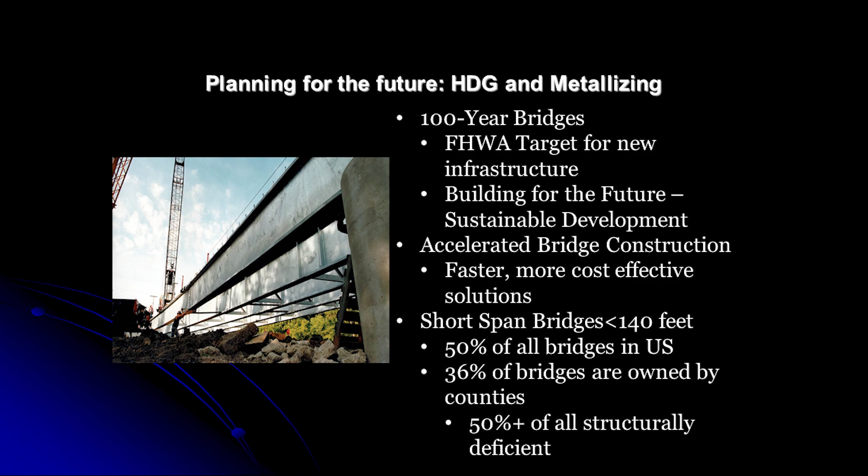International Zinc Association is a nonprofit organization, so we want to promote anything that has to do with zinc coatings, galvanizing, metallizing, zinc-rich paint. We try to give people the best practices and some of the things that are happening in the world today, because we're all taxpayers first, and we need to do something to save taxpayer dollars. Federal Highway is looking for a 100-year bridge. How are we going to get a 100-year bridge with coatings? Well, we have case studies that show galvanizing and metallizing can actually give DOTs and bridges a 100-year life. Did you know that 25 to 30% of corrosion can be eliminated if the right corrosion protection system was employed right out of the get-go?

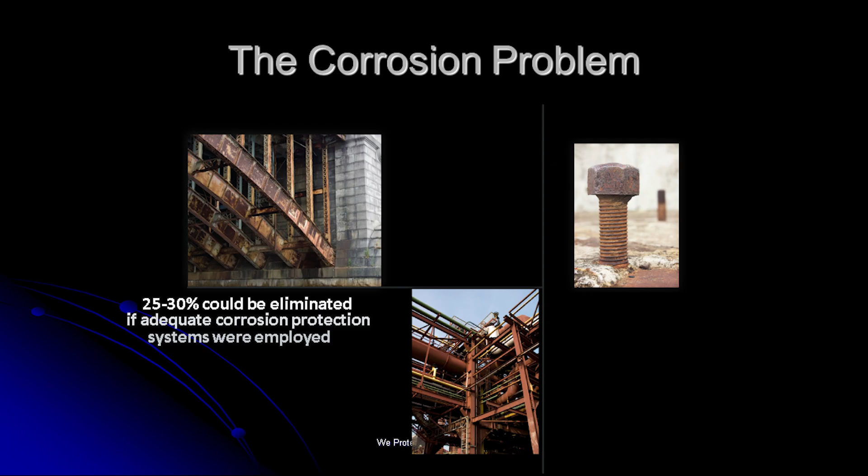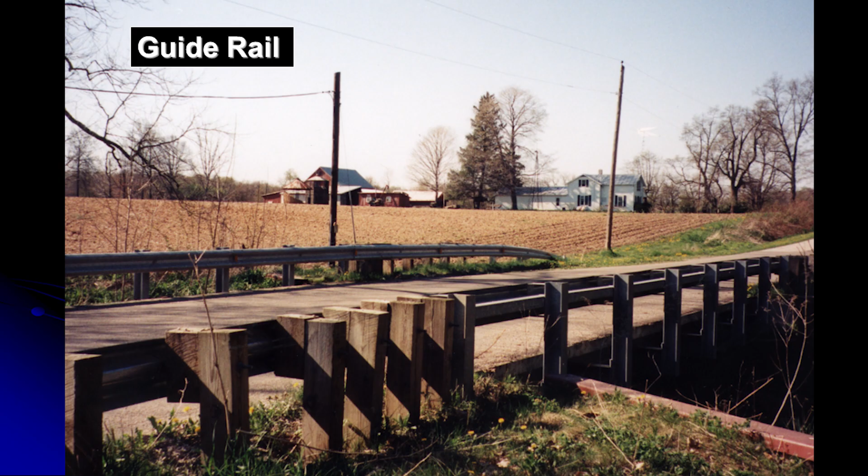Here's some guide rail. Why is it federal, highway, state, local, state engineers are specifying hot dip galvanizing for guide rail, but we're painting our bridges? I mean, we know that galvanizing works. It's a proven technology, and it seems like we're just keeping going down the same path. The one thing that's good is we're starting to use zinc-rich paints, and the zinc-rich paints are giving a lot longer longevity in our bridges.

A colleague of mine from Ohio, a county engineer, brought him out to this bridge and wanted to know why 13 years later his three-part paint system is failing. But you've got it right there, that's actually hot dip galvanized, and that was put in at the same time. The hot dip galvanized is still in fine, pristine shape.

How would you fix this? You can fix this. How would you fix this? This is not a trick question. You can fix this. How would you fix it? Yeah, sandblast it, but if it's in a salt-infested environment, it's recommended you power wash and remediate the salts before you sandblast it. A lot of people aren't doing that. They're starting to come to that, but this is definitely fixable.

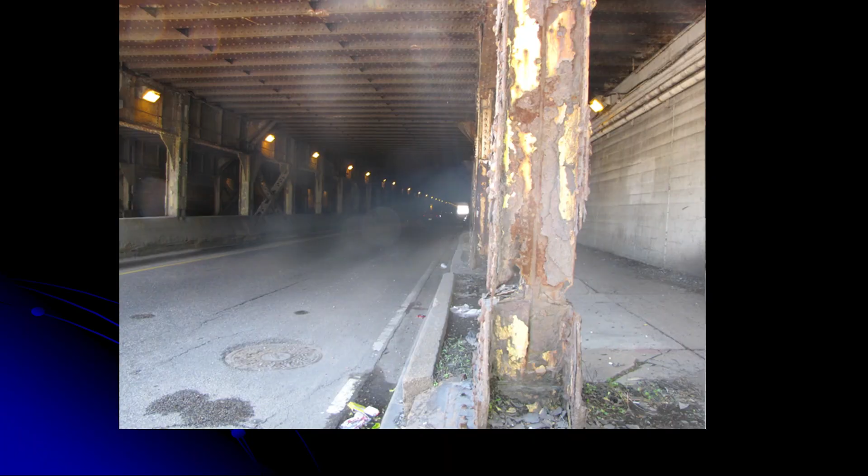What about something like this? This is actually in Chicago, about a mile south of United Center. With steel, this is fixable. This looks terrible, right? Oh, man. For you engineers, how would you like to go underneath this bridge? This bridge was in service at the time that this shot was taken, but this is fixable. Steel is fixable. Okay, and here you can see, here's the fix.

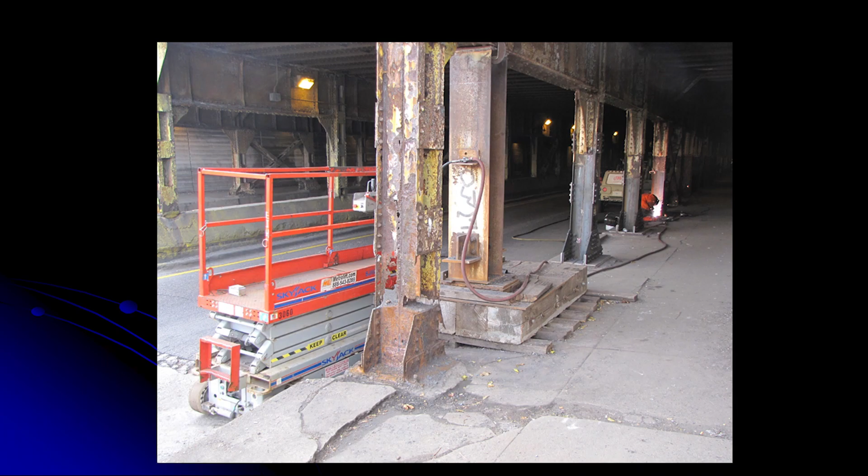The problem that I have as a taxpayer is they replaced the steel, but they came back and they never put a coating on that part of the steel. And there's the fix. This is about 2 years later. So steel is fixable. That's the good thing I like about steel.

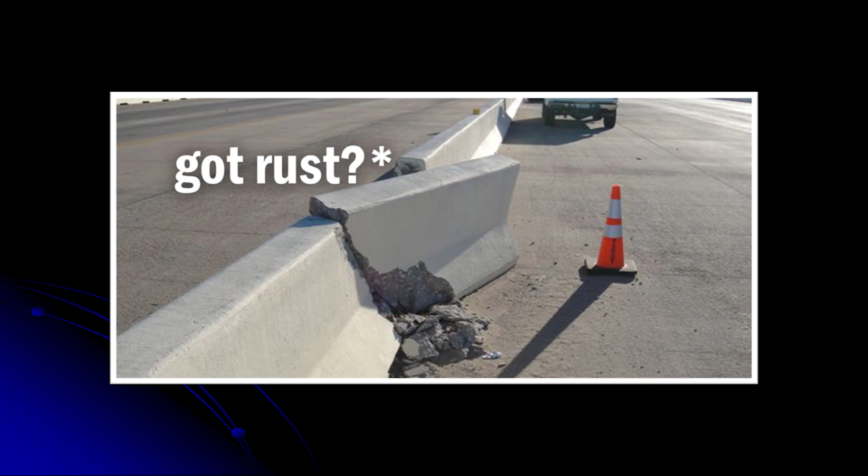So, does anybody know what the worst accident in NASCAR history is? Does anybody want to guess what the worst accident in NASCAR history is? You would think a crash, or a car going up into the stands, or a tire coming off. No. The worst accident in NASCAR history is a porous concrete bridge failing under one fifth of its weight. The chlorides came in and ate the steel, and as the people were going across the pedestrian bridge, it fell.

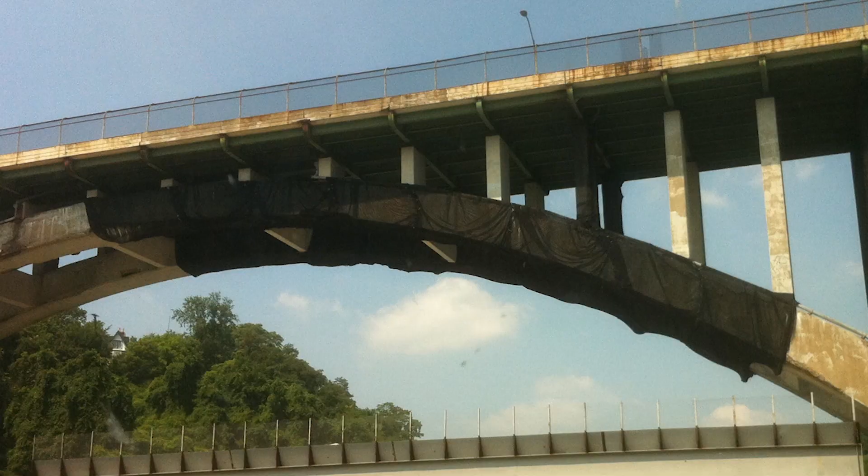This is actually about 10 years ago. I was at the International Bridge Conference in Pittsburgh, and I was going along the roadway, and I saw this mesh on top of this concrete bridge. The mesh was actually to keep the porous concrete from falling on the cars below. I thought that was interesting, but then the next shot is really interesting. You see that below? That's not a bridge. That's a $2.7 million catch basin. That's there just to keep the concrete from falling on the cars below. This bridge has now been replaced with a steel arch bridge.

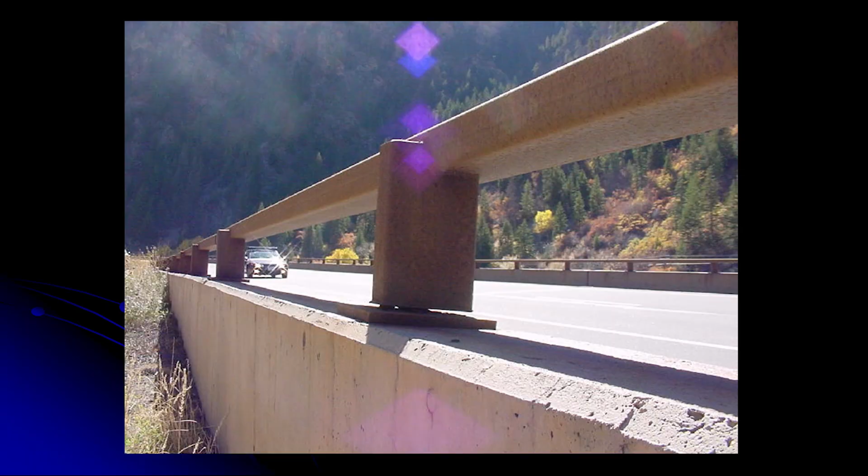And then weathering steel, we know that Federal Highway has a guide for weathering steel. Make sure you follow the guide. This is actually in Colorado, where they had 52 miles of this rail, and from the snow and the ice and the salts piling on top of this, you can see the welds are gone. They had actually replaced this rail, and had to get bond money to replace it. I mean, it fit in really well with the mountains and everything, but it didn't have the longevity that they had hoped for.

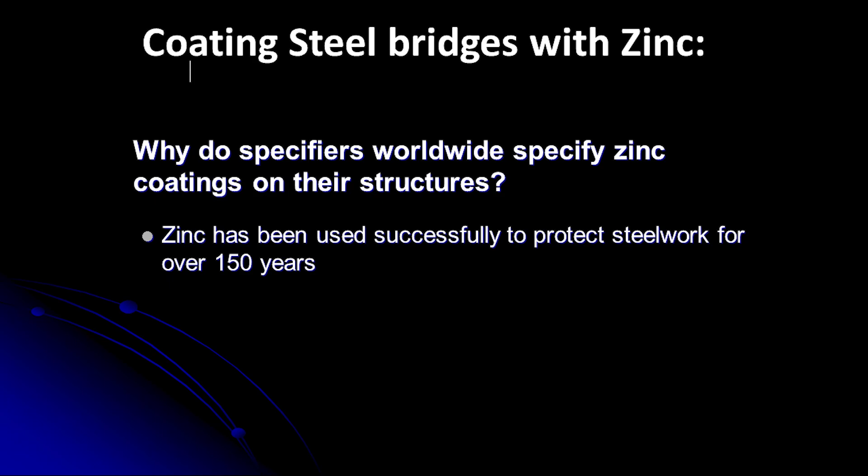Worldwide, zinc is protecting. I mean, everything that goes around, you see zinc protects. Zinc is starting to get more and more notoriety throughout the world. It's been used for 150 years. This is actually a bridge in Illinois. It's hot dip galvanized. It was actually hot dip galvanized in 1970. It's a little north of Champaign in Illinois.

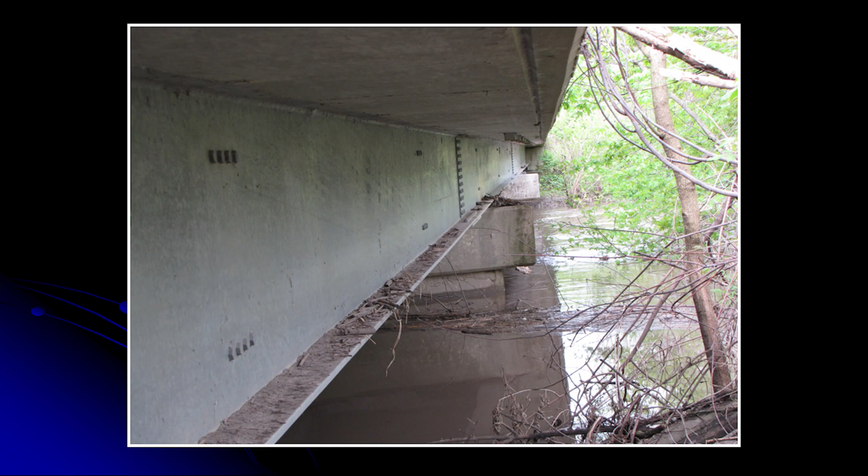This bridge is over 50 years old. The county engineer, Craig, told me that this bridge is underwater several times a year, with big logs, sticks and debris pounding on the side of it. But it's still fine, in pristine shape. You can see that from this shot.

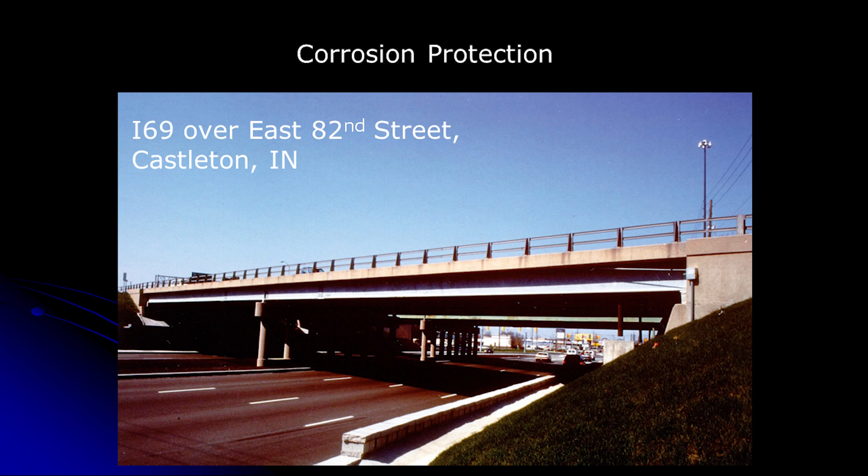Dr. Rob Connor from Purdue University thinks this bridge was actually a Purdue initiative, because what they did is hot dip galvanize the two northbound lanes of I-69. This was in 1970, and the other side used lead-based paint. In '84, they had to blast and repaint the lead-based paint.

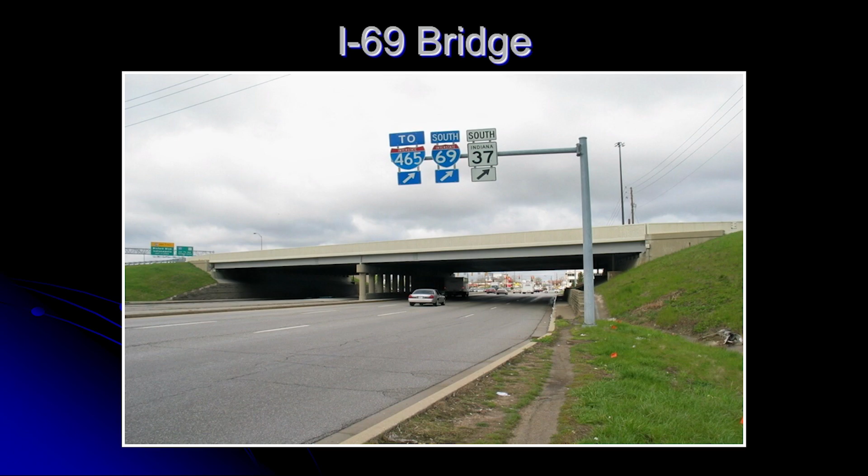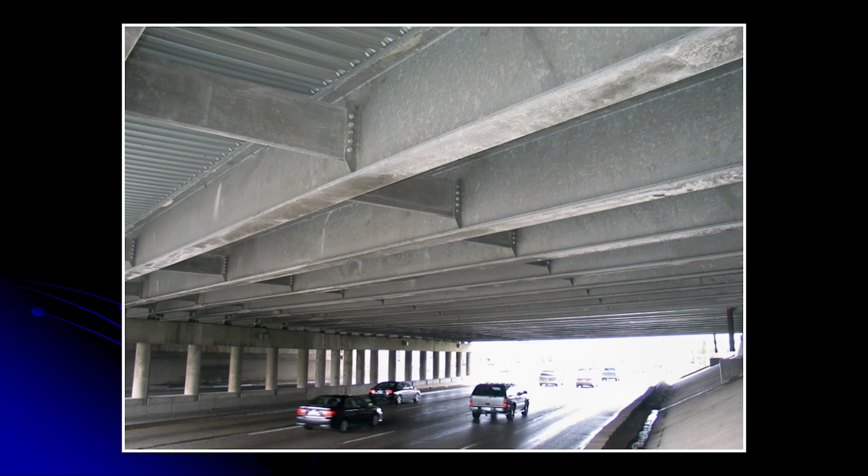In 2002, they decided to widen the bridge. You can see the gap in between there. So when they looked at galvanizing and the different technologies out there, they decided to metallize the existing portion of the bridge and metallize the 4 new beams they were putting in, and then paint them. So they duplexed that particular side of the bridge.

There's the bridge today. Here's the underside of the galvanized bridge. This galvanized bridge is over 53 years old, and it's still fine, in pristine shape.

The sad news about this bridge is I've been able to use it as a case study for many years, but I think next year they're actually tearing this bridge down to make the exits larger, which is really a shame. But Dr. Rob Connor is going to get a couple of these pieces to put in the S-BRITE Center at Purdue University, where he has a lot of pieces from the I-35 bridge and other old bridges.

But here's the mil readings on that bridge. For new steel to be galvanized today, we've got to give you 3.9 mils. Here's a bridge that's 53 years old that still has 6.82 mils. So for a 100-year bridge, no problem with galvanizing.

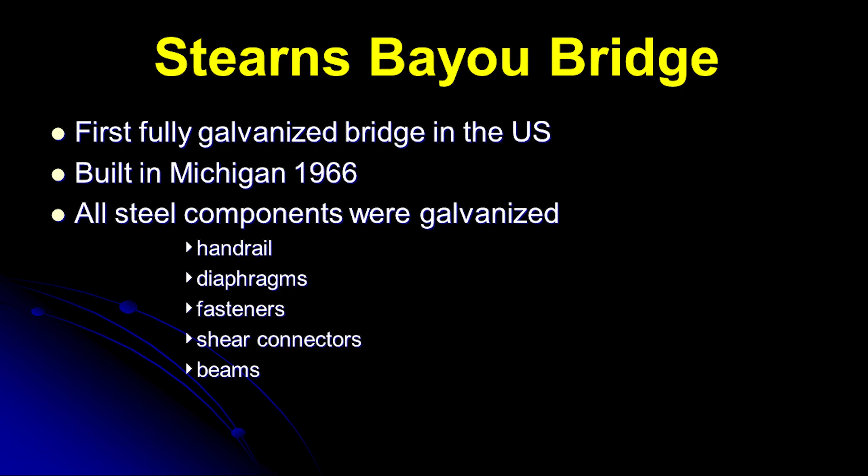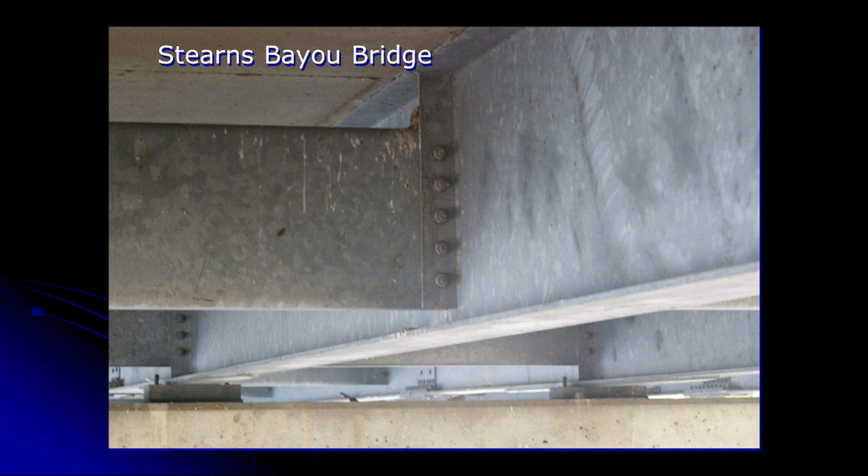And there's the pigeon poo. Pigeon poo does not bother or hurt hot dip galvanizing. So that's another nice attribute about galvanizing.

This is actually a bridge in Pennsylvania that was galvanized in 1971. It's still in fine, pristine shape. The solution: hot dip galvanizing gives you this long protection because it gives you a barrier, it gives you cathodic protection, it gives you a zinc patina, and it forms a metallurgical bond to the steel.

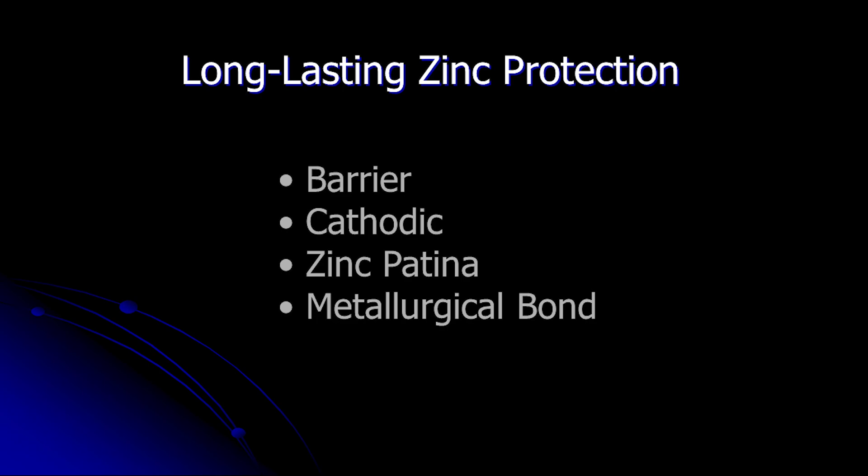Here's a bridge. As long as the paint, the galvanizing, the metallizing, even grease, as long as you have something to protect the substrate, it's not going to rust.

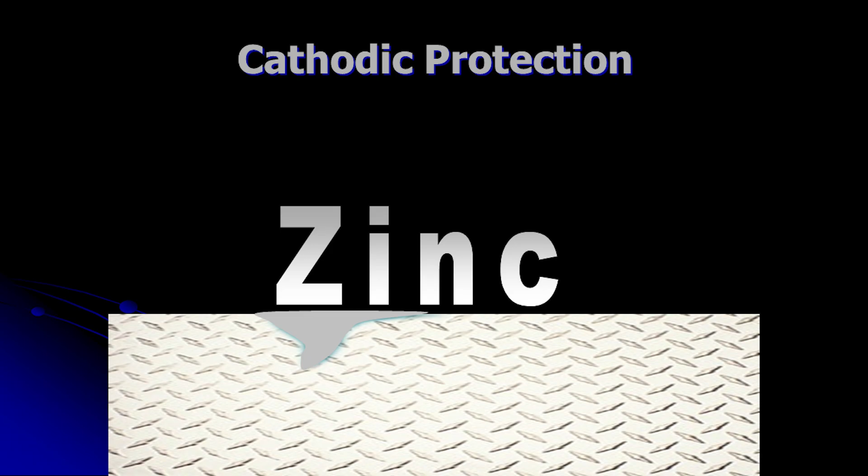If something is hot dip galvanized or metallized, you've got cathodic protection, where a scratch is going to be protected by the action of the zinc coating. And why is that? The galvanic series of metal: zinc is the anode, steel is the cathode. The anode is always going to want to protect the cathode. It's a law of nature.

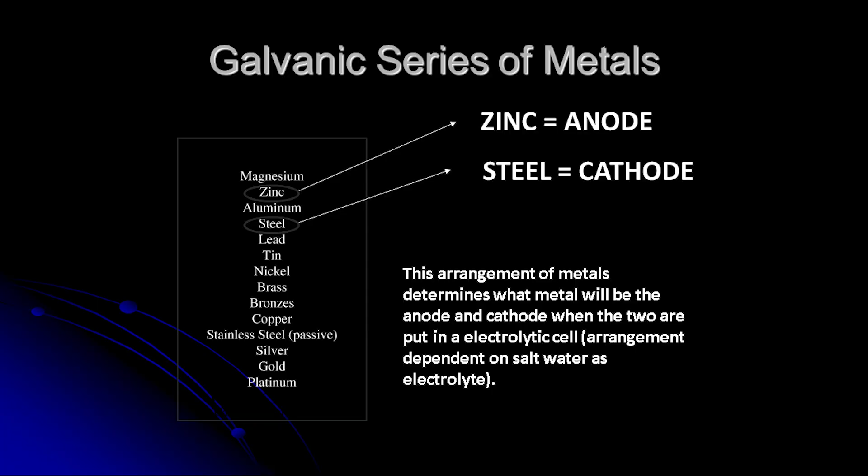If you look at a lot of boats and vessels, they have these zinc anodes, and they actually have screw holes on there because as the zinc slowly depletes, you replace them with other ones. Zinc corrodes at 1/30 of what steel corrodes at. That's why zinc gives you that long-lasting protection.

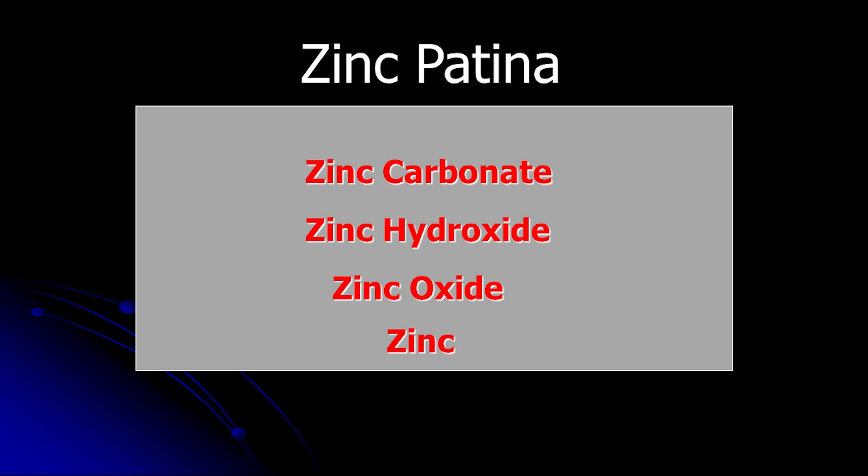And you've got the zinc patina. So a piece of steel comes up out of the hot dip galvanizing bath, and the first thing that hits it is the air. After the air hits it, the first patina is formed, and that patina is zinc oxide. It sits around a little while, and by the time moisture or rain gets on it, the next patina is formed - that's zinc hydroxide. Then after it sits around longer, with carbon dioxide, usually anywhere between 9 to 14 months, the last patina is formed as zinc carbonate.

Zinc carbonate is very stable. When you have something that's been out in the weather, galvanized over 14 months, you don't have to worry about doing any prep to the galvanizing. But if you're going to paint over galvanizing in the first stages, with zinc oxide or zinc hydroxide, there's a prep required, and you follow ASTM D6386.

When you have the zinc carbonate stage, you just come in and power wash it and give it a coat of paint. You don't have to do any prep. So our whole thing is with galvanizing, you should never have to sandblast or abrasive blast that bridge again, as long as you maintain the galvanizing coating that's on there. We feel that's a game changer, because for state DOTs, the biggest cost in painting a bridge is the prep—taking the old paint off and then re-prepping, setting up. If you can just power wash and then repaint, how much of a savings is that going to give the states? It's going to be a lot.

Hot dip galvanizing is metallurgically bonded to the steel. What do we mean by that? It's actually part of the steel. So the gamma is 75% zinc, 25% iron. The delta is 90-10. The zeta is 94-6, and the last is the 100% pure zinc.

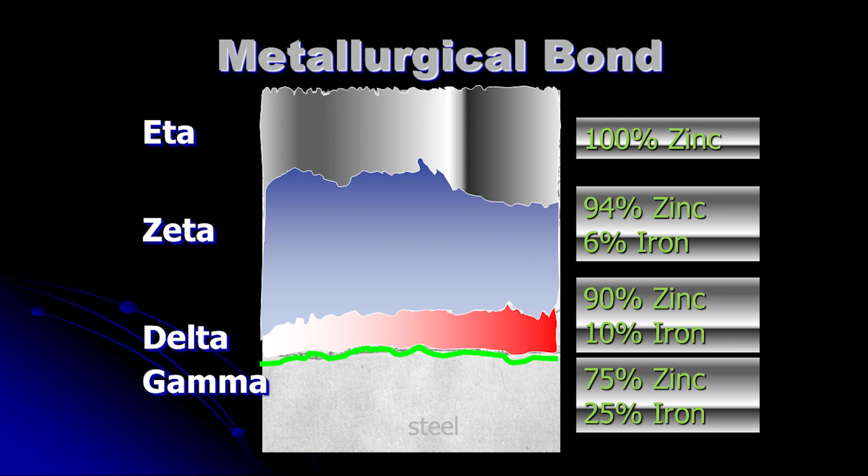So you're not going to have to worry about water coming underneath the coating and popping and peeling and chipping it off. The zinc slowly corrodes, and it corrodes at a rate of, like I said earlier, 1/30th of what steel corrodes at. What about the hardness of hot dip galvanizing?

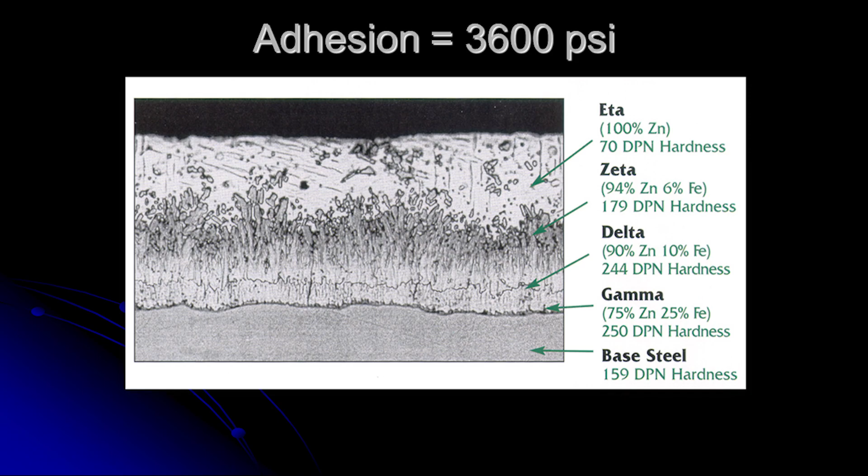What about the edges? We grow the coating and then freeze it, so the edges are going to have the same amount of coating as the flat surface, which is a wonderful thing, because when we look around our cities, the edges and corners is what usually fails most, because the surface tension of paint wants to roll off.

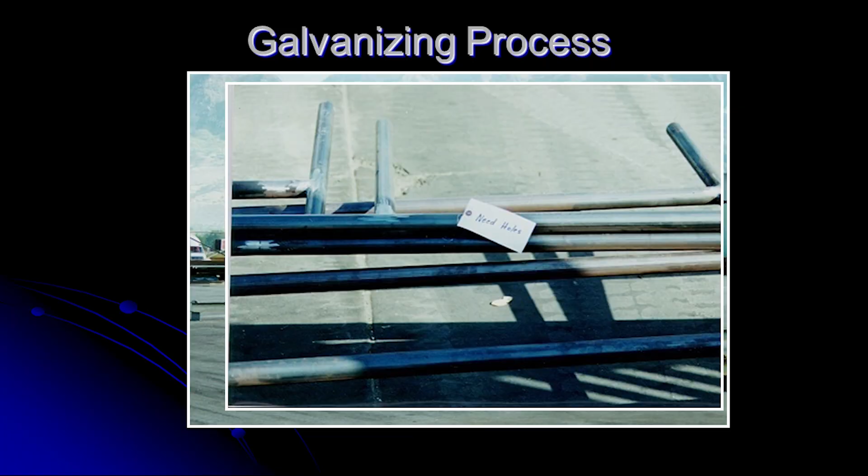Has anybody here been to a galvanizing plant? How many people have been to a galvanizing plant? A few of you. For all of you that want to go to a plant, you can call me, or there's galvanizers in most states, and they'd be happy to give you a free tour of the galvanizing plant. It's pretty interesting.

The steel comes in on a truck, a van, a car. It goes to a process area where they tag it, get it put on a rack, and then it goes through this series of baths. The first bath is a degreasing bath to get rid of the grease, grime, oil, or dirt. It gets rinsed, then goes into a pickling bath, either sulfuric acid or hydrochloric acid, to clean the mill scale and any oxides that are on it. Then it goes into a flux bath.

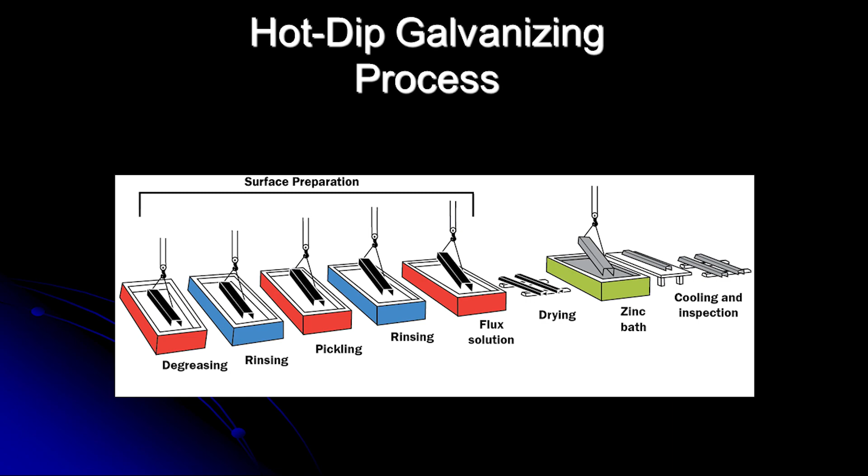The flux bath actually preheats the steel to 160 degrees. It puts a light coating on it to keep it from oxidizing before it goes into the molten zinc. Once it goes into the molten zinc and comes out, it's ready to go. There's no cure time—you just have to wait for it to cool and put it on the truck.

Most galvanizing baths in the United States run anywhere between 830 and 840 degrees Fahrenheit. And to meet the ASTM 123 spec, they have to have a minimum of 98% pure zinc in their kettle. Some people add aluminum, bismuth, and nickel for fluidity and reactivity and things like that. And what ends up happening is you have this intermetallic of iron-zinc that actually forms inside the kettle bath. Then once the steel hits temperature, it's ready to come out.

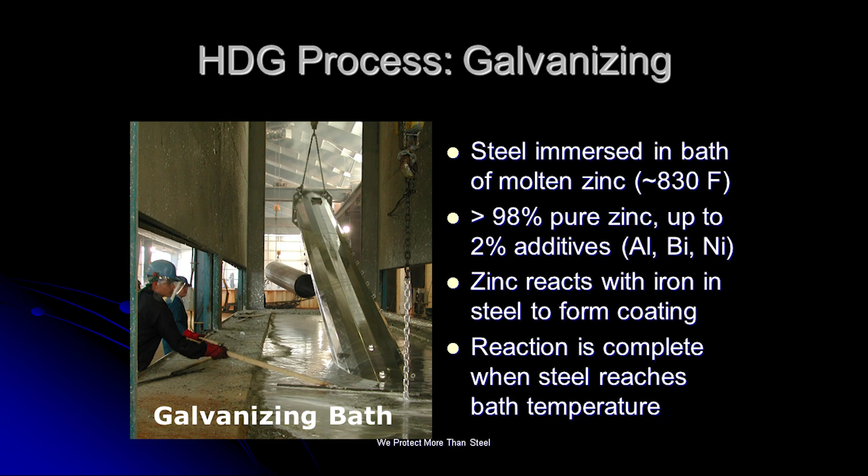If there are any impurities on the steel, the zinc will not adhere to the steel, and we call those bare spots—you know it right away, you don't have to wait. This either needs to be fixed with ASTM 780, the repair of hot dip galvanizing, or the galvanizer will just take it back, and they'll rerun the piece and re-galvanize it. They'll strip the zinc off and rerun it.

Hot dip galvanizing—zinc is recyclable. That's used today. No volatile organic compounds is another big thing with that.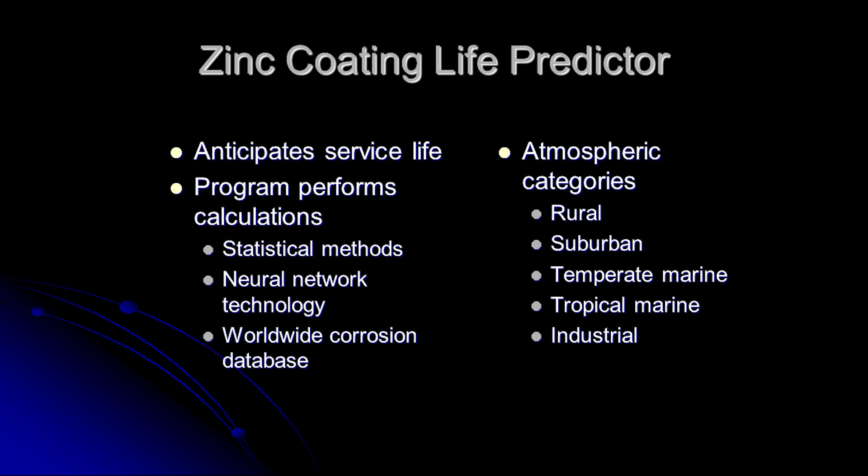This is actually a life predictor that academia did many years ago, and what they did is they ended up looking at all these different environments: industrial, temperate marine, suburban. So if you take a look at that bridge north of Indianapolis in the snow belt, in a suburban community, if you look at this chart, 3.9 mils in the red should give you about 95 years before you get 5% surface rust. Now, 5% surface rust doesn't mean the zinc coating has failed. What happens is we're saying the eta layer is gone.

You still have some of the other delta and gamma, so that zinc is still there. Now it's time to come in and power wash and give it a coat of paint. And this way, that's what we're talking about - if you don't have to abrasive blast that bridge, it's a game changer.

So that's at 3.9, you've got 95 years. Look at that bridge in Indiana - it's 53 years old, and we still have 6 mils of zinc still left on it. So there's your 100-year bridge, no problem. And there's the chart again.

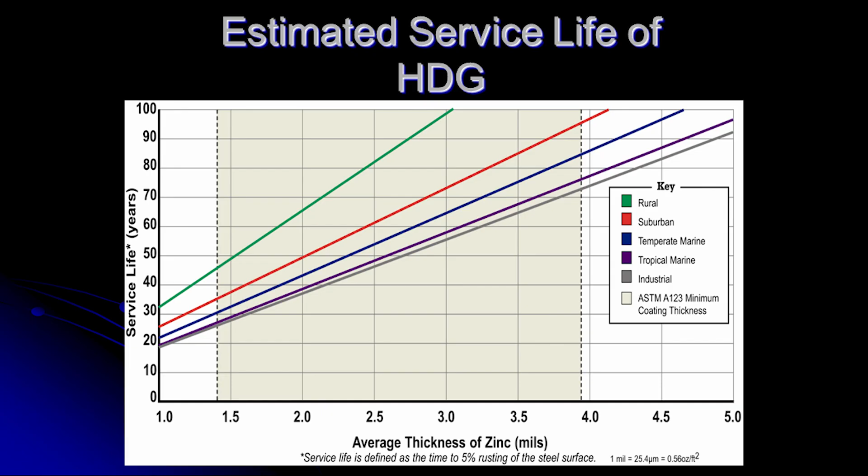Remember, hot dip galvanizing is metallurgically bonded to the steel, and also has cathodic protection. So any scratch or any ding, you don't have to worry about undercutting and things like that.

What about metallizing? Metallizing is really coming on strong, and one of the reasons why we see metallizing coming on strong is because industry and the states are looking for something with more longevity. So what's happening is we've got, I believe 4, I think it's up to 5 now, bridge fabricators that actually have metallizing equipment inside their plants. So not only are they fabricating the steel for the bridges, they're metallizing it in-house. That's a game changer for the fact that now they're lower cost producers and there's more competition. Metallizing is going to continue to come down in price, which is good for all of us, because like I said earlier, we're all taxpayers.

So metallizing is either zinc wire or zinc powder that gets heated up or gets arced together, and it actually atomizes the zinc, and you have molten zinc that actually gets thrown onto the substrate. It's either field or shop applied, and it's 85% as dense as hot dip galvanized.

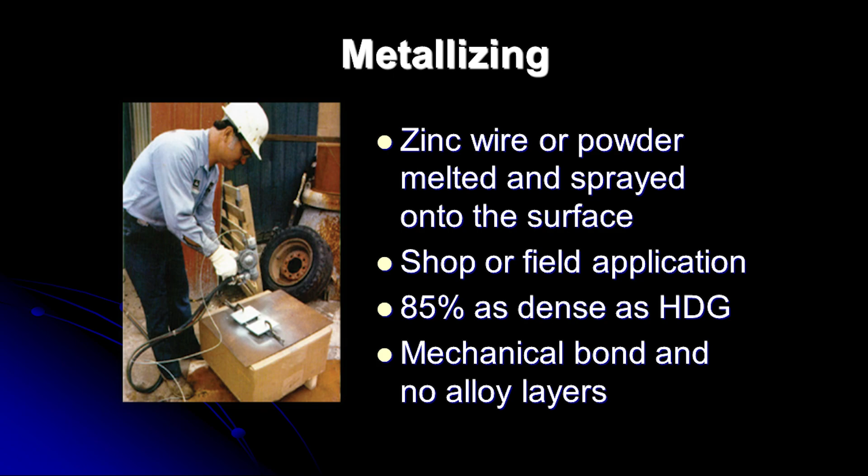And it's a mechanical bond. It's not a metallurgical bond, so there's no alloy layers. And you got several specs out there - you got the spec from NACE, the spec from American Welding Society and SSPC. Now they've come together as AMPP.

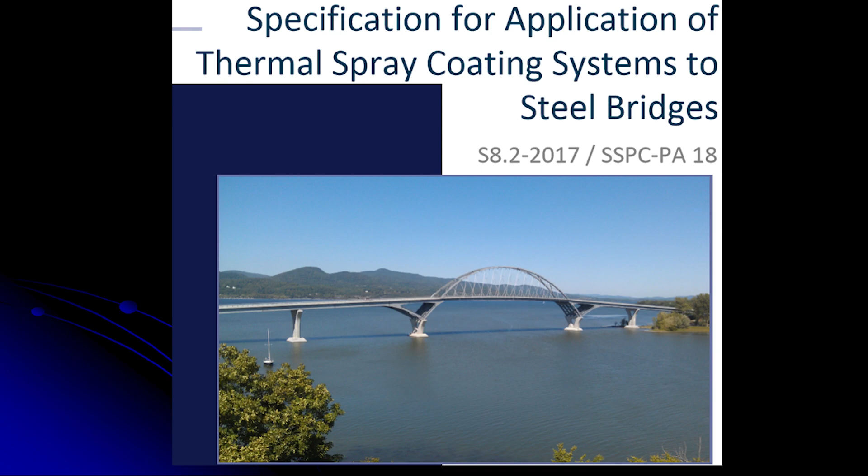But the thing that's really good, in 2017, and some of the people in this room I know were on this committee, we came up with a metallizing spec for the bridge and highway folks, because they just wanted to give them something - hey, what's a good spec if we want to metallize, a good guide, because it's all over the board as far as what to do and what not to do. There's a couple revisions with this, but this is a really good guide to get the states going if they want to go with a metallizing specification from the National Steel Bridge Alliance.

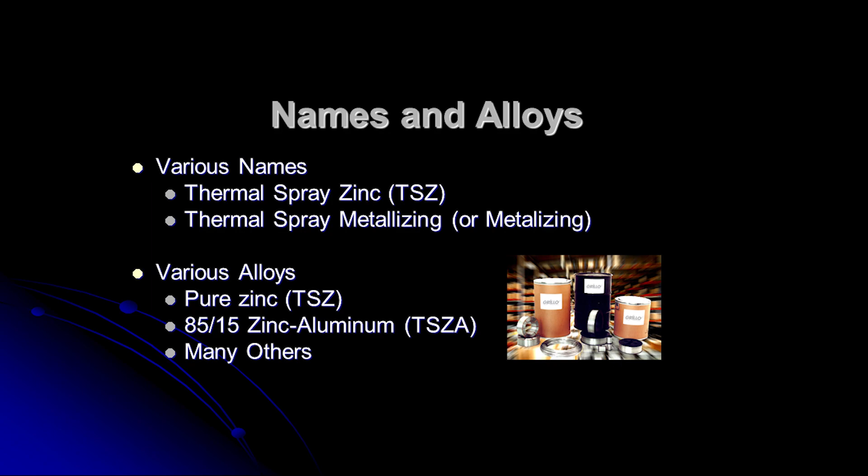And there's different names and alloys. For bridges and highway, it's usually 100% zinc or 8515, which is 85% zinc, 15% aluminum. And the 8515 is usually used in places where they have a lot of salt on the roads or by the coastal areas, because you're going to get a lot more longevity out of 8515 than 100% pure zinc. And this is a 100-year-old process. This isn't something that's brand new. This is a proven technology.

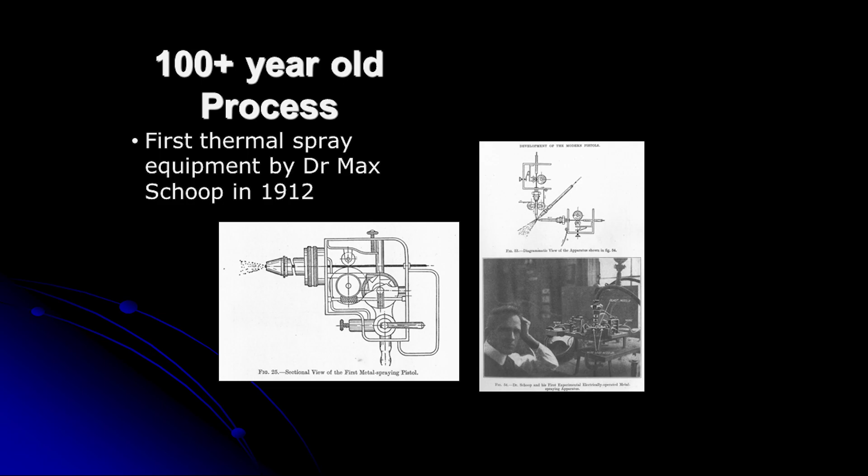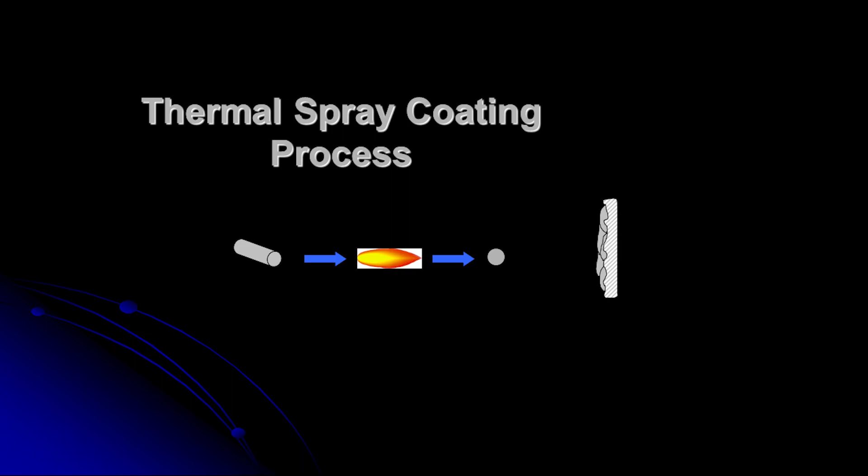So the thermal spray process - here's a piece of zinc wire. It goes through a flame. That flame atomizes the zinc, and then it gets thrown onto the substrate. This is just the equipment that's involved in flame spraying, okay, which uses a flame. And you can see right here that's actually atomized zinc that's actually come out of that flame.

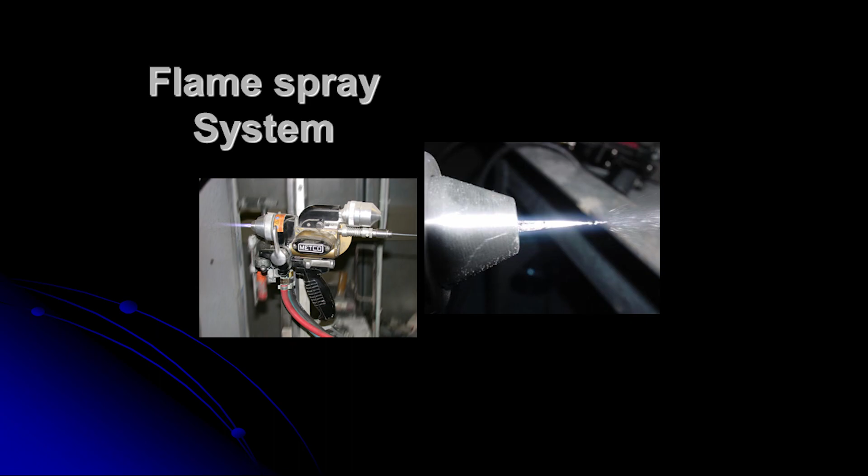But for the bridge and highway world, this is a much slower process - this is for smaller stuff. For the bridge and highway world, what people are using is the twin arc spray, where you have a positive and negative zinc wire that actually come out, and when they're energized and when they touch, that atomizes the zinc, and then you have clean air throwing it onto the substrate.

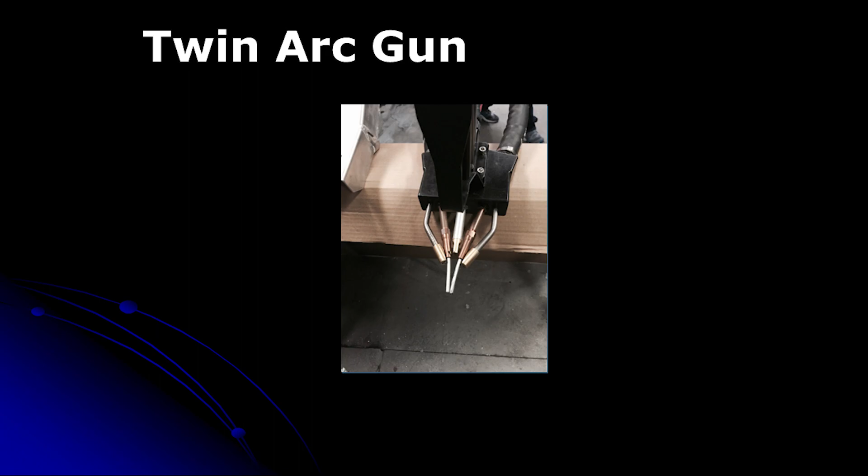And that's what the gun looks like. When those two pieces of wire are powered and they hit, that's what arcs and throws it onto the substrate. There's a shot of the inside of the gun.

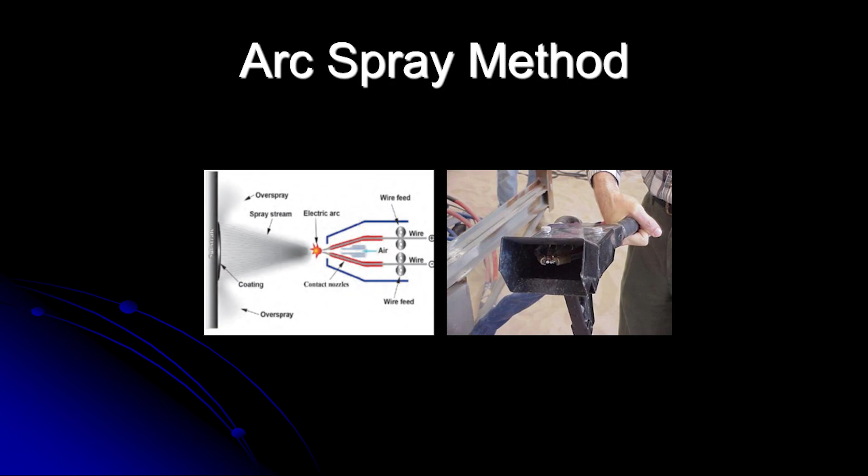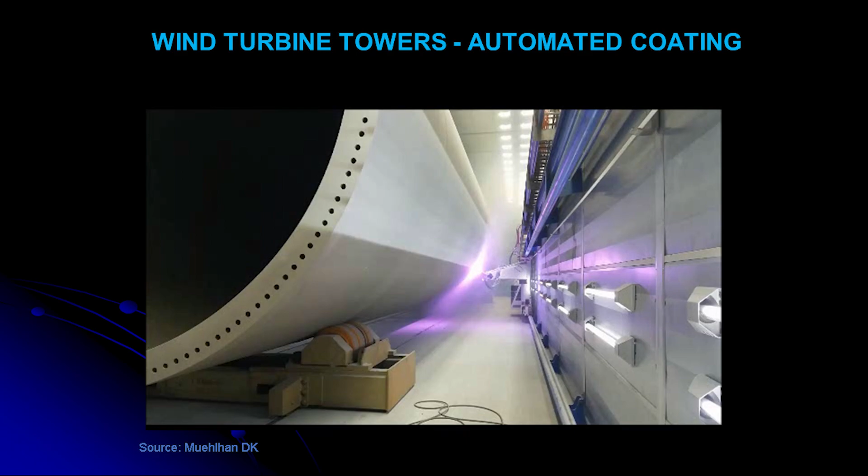But things are changing, because a lot of companies are automating the metallizing process. Now it's a factory-controlled process with a robot doing it, as well as manual work. Some wind turbines are actually metallized via robot. At the Steel show last year, there was a guy with a robot that came in and did one side of a beam, flipped up, did the other side, and came down. People are looking to get faster and better, and that's going to drive the cost down even more.

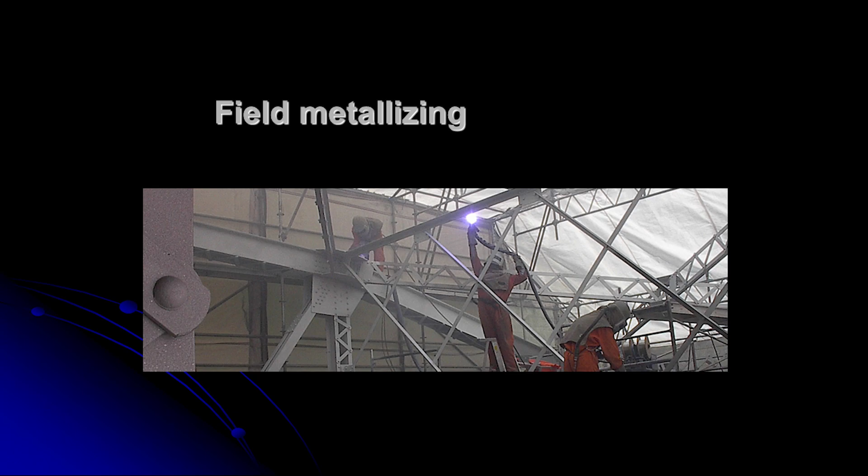Here's some people doing field metallizing. A lot of times these bridges that are in the field can be metallized. There's the Kodiak Bridge in Alaska, the longest bridge that was metallized - they actually field metallized it in place, and then sealed it in place. Here's another shot of a field application of metallizing.

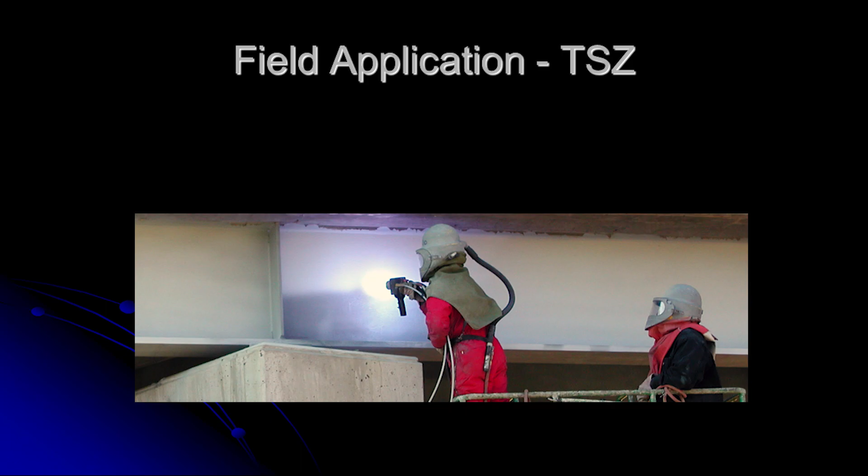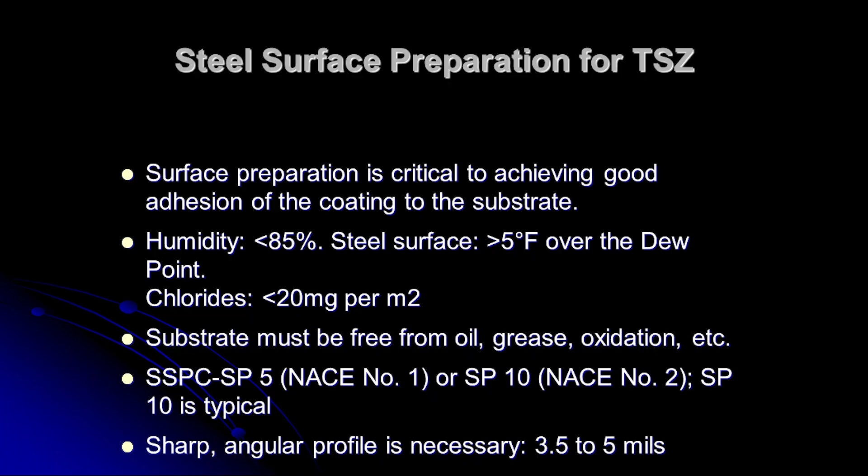One of the things I want to bring up - there's all different dew points and things to consider. The main thing is, if you're going to metallize something, you want to make sure whoever abrasive blasts the steel gives it an angular profile. You need something angular to get that zinc to adhere to the substrate. We always say a 3.5 minimum angular profile, and then you'll have a good profile for that zinc to hang to, so you get nice, good adhesion.

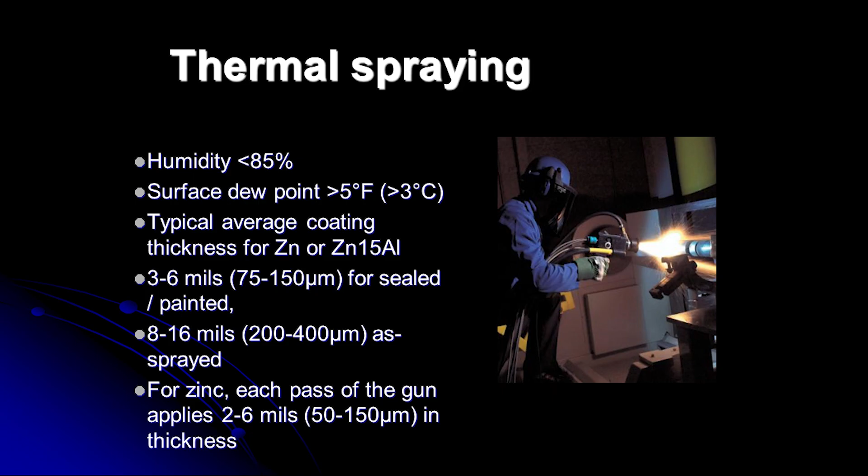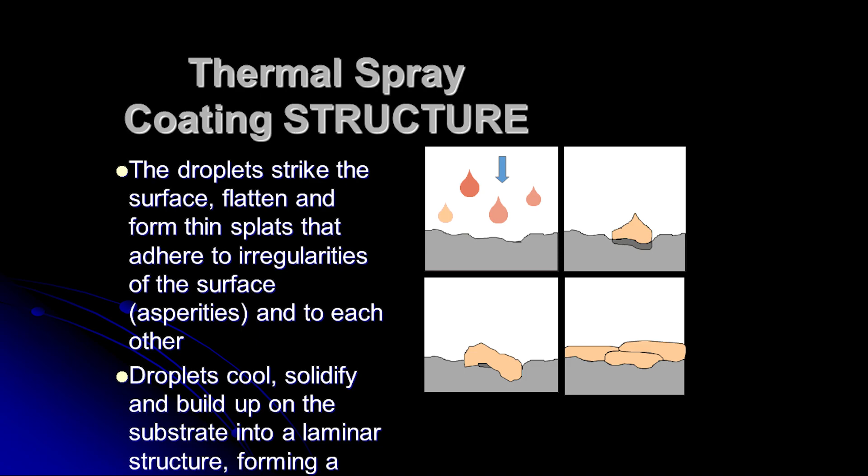The times and passes, depending how fast the guy's going, result in anywhere between 2 to 6 mils. Some people want to seal the metallizing, some don't - there's a lot of different sealers. I'll talk later about a sealer somebody did in Canada that I think is pretty interesting for metallizing. So you have all these blotches, these upside-down Hershey Kisses, being put on the substrate, and they pile on top of one another. What ends up happening is you get some voids, oxide inclusions, and unmelted particles.

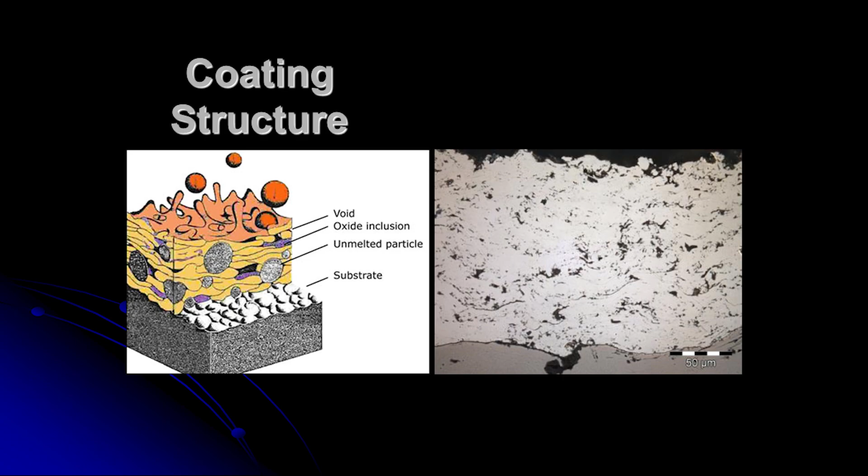Here's a micrograph of what the metallizing coating looks like. It's not like galvanizing where you've got some inclusion and porosity in there. That's why they say to build it up a little bit. But it's still a wonderfully great coating, and it's going to give the longevity that the DOTs are looking for.

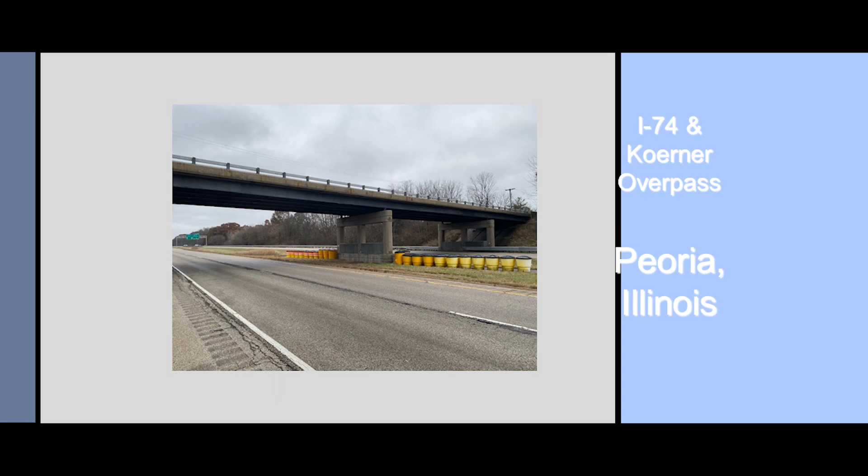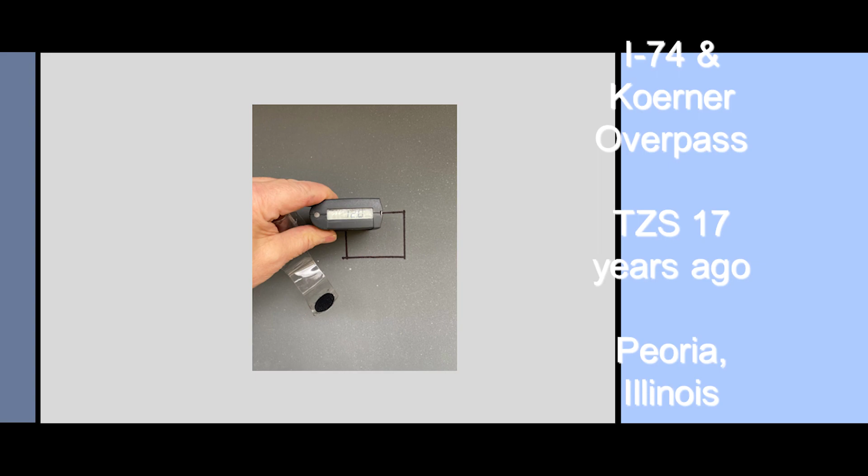This is a bridge I was on a couple years ago in Peoria. It's now about 20 years old, but the average mils on this is over 13 mils. What you do is put a center punch to mark where it's at, and draw it, so every couple years you can come back and see how much depletion the zinc has lost. This way the DOTs will know when they need to come in and power wash and paint it, because you don't want to let the metallizing and zinc get down to where you're into the substrate and now need to abrasive blast. It's a lot easier to come in and power wash and paint than to start abrasive blasting and do something else.

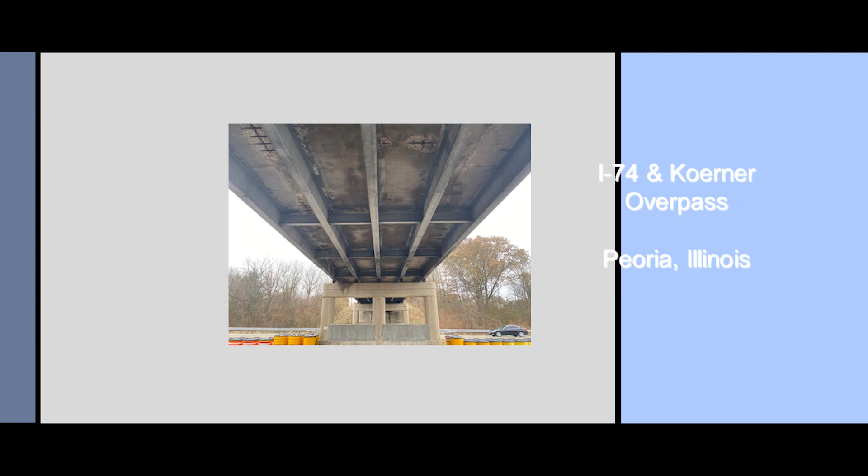It just shows you it's in great shape. On the other side, if they had used hot-dip galvanized rebar here, you wouldn't have the concrete peeling off of there.

This is actually the Jane Byrne Bridge in Chicago, called the Circle Interchange. When this job was being done, AECOM was the engineer, and they said it was one of the most complex bridges - or one of the most complex projects - going on in all the United States, because of the underground tunnels in Chicago: the water, gas, and electric lines. It was a huge project and a huge undertaking. Sarah Wilson, the District 1 bridge engineer, had been using galvanizing in all the bridges going down to Chicago since 2000. She wanted to do something, but knew a lot of these bridge pieces were too big. So what they decided to do was anything that wouldn't fit in a local galvanizing bath, they would metallize - and that's what they did. You've got over 100 million pounds in this job. It was a huge job.

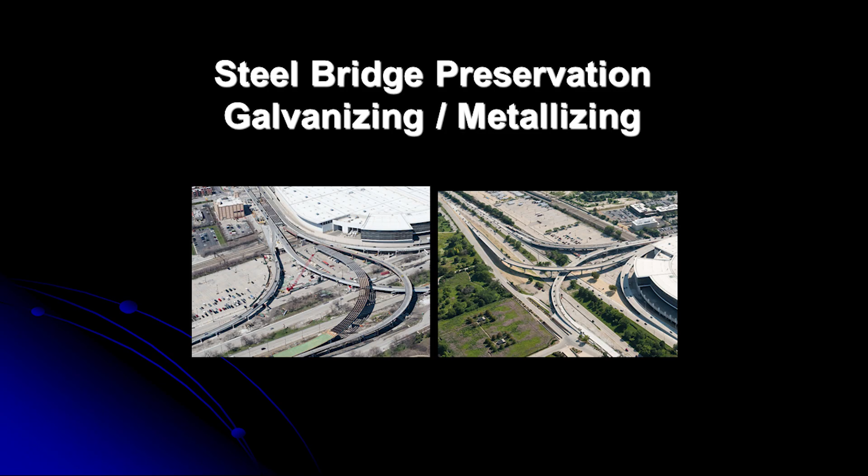I was actually on this bridge last year. I said, hey, this bridge is 3 years old - let's get some mil readings, so down the road you can see where you started and when you're going to need maintenance on it. So that's what they did. You can see there are my marks and the center punch - you take 5 readings across and 5 readings down, then come up with the average. That just shows you how huge this project and undertaking was, and it's almost finished.

It's like almost a 4-year project. Okay, what about other coatings?

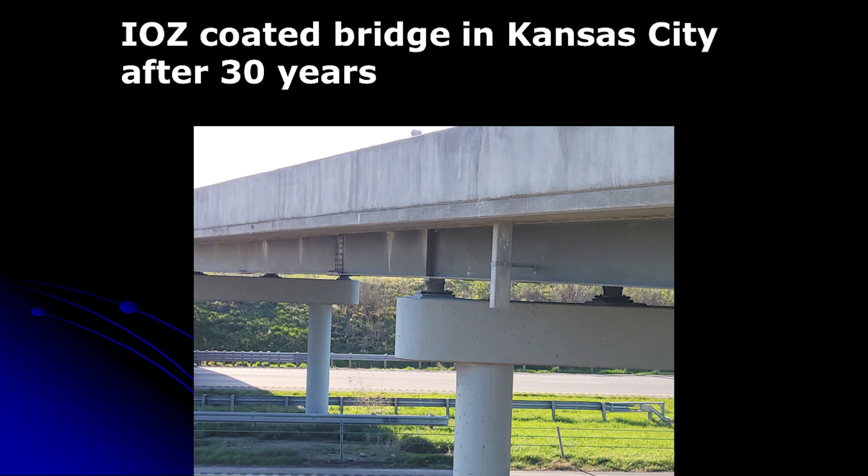Zinc-rich paint and zinc-rich primers are another avenue that's really working for the DOT road, and also for ships and Navy and other places. I got this from the National Steel Bridge Alliance - this is an IOZ, inorganic zinc coating, in Kansas City, that's about 30 years old. One coat, and it's 30 years old.

Inorganic zinc is a wonderful coating. It's just the application window is really tight, and you really can't come and do field repair and things like that.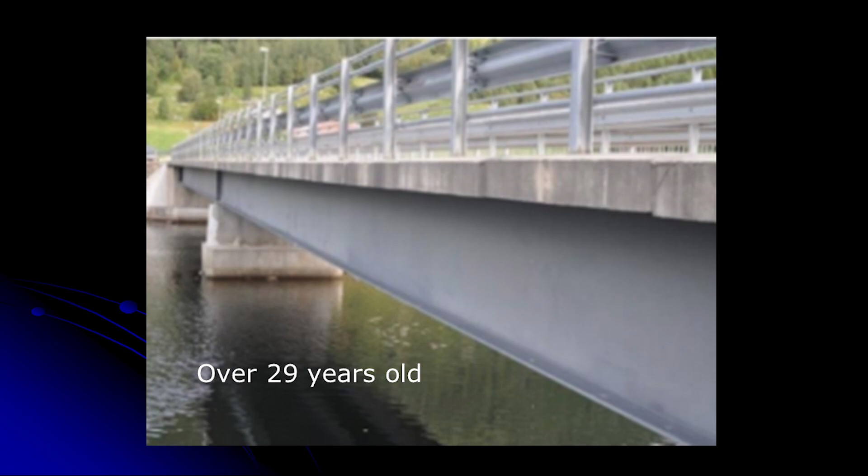Now, is this going to last 100 years? No, but the thing is, when you need maintenance on this, you can power wash - don't wait till the zinc totally depletes itself. You can power wash and recoat over it. That's what the International Zinc Association is trying to promote: don't let the zinc totally deplete and then have to come in and abrasive blast and repaint. You still got some zinc there and some life there - that's the time to come in and do your maintenance.

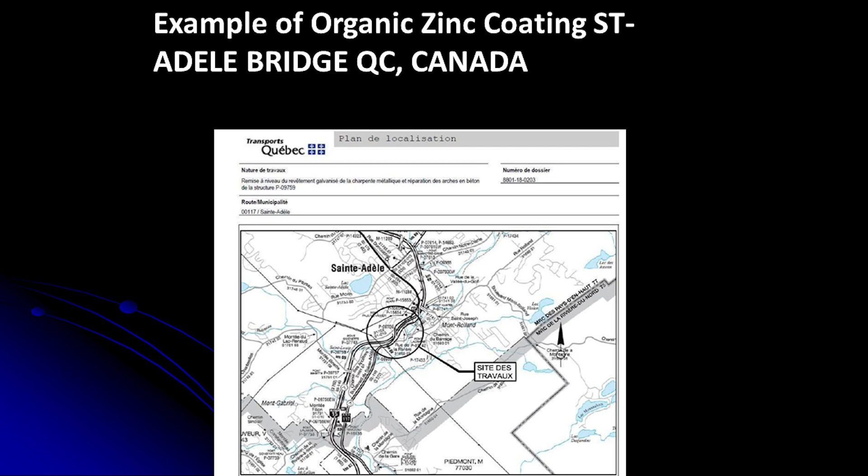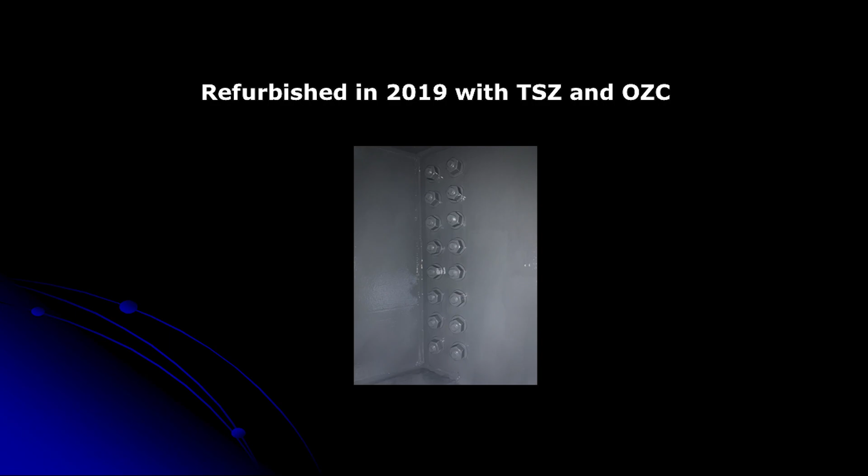This is actually a bridge in Canada, in St. Adele, Canada, and what they did is metallize this bridge. After they metallized it, they went over it with an organic zinc-rich paint. So now you've got an anode on top of an anode. Some people say it's good, some people say it's bad, but there was testing done on this, and the longevity seemed very favorable. This bridge is a couple years old now.

So there are things out there - zinc protects, zinc works. In third world countries, over 800,000 people die from lack of zinc, so we need zinc. You don't want to be welding it and breathing it, but you're not going to die from it. I thought you would when I was a welder many years ago. But zinc protects.